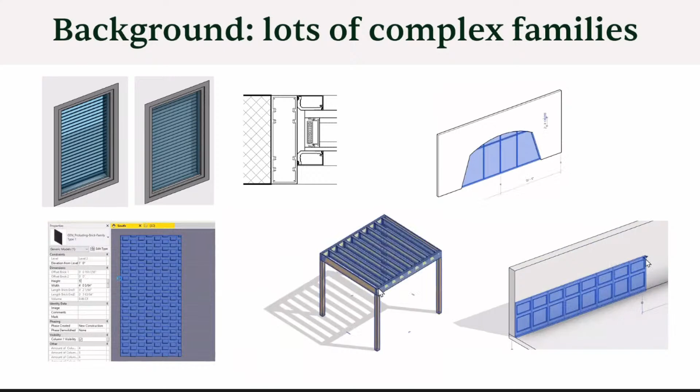Perfect start. Okay, so now we're talking. Now we're ready to formulate some formulas. So let's start. As I've been saying, I've been in a Revit families rabbit hole, and these are all the families I've been creating in the last year and a half. All my clients have been asking me for weird families, families with arrays that need trigonometry formulas, nested shared arrayed nested detail items, multiple layers, and that require complex formulas. It would be easy to mess them up, so I had to study formulas to make them even better.

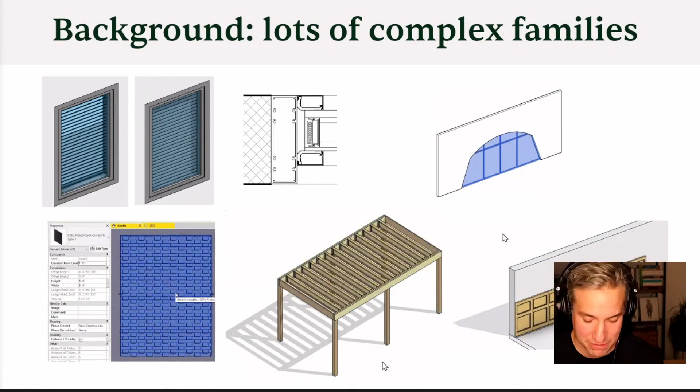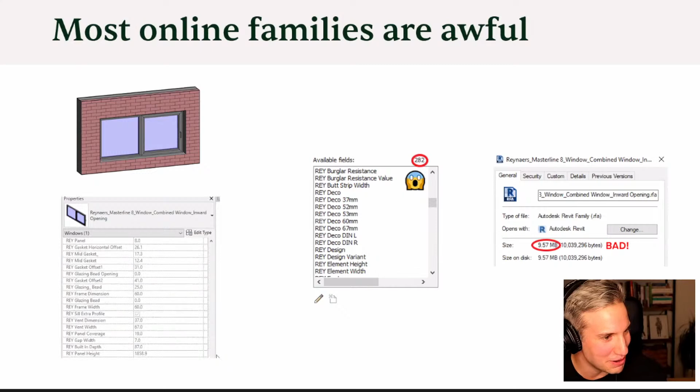One of the reasons I've been interested in Revit families is that in my experience, most Revit families found online are quite awful. I've been roasting this family for a while and wrote about it. I hope this company doesn't sue me for roasting their family. It's a family found on the BIMobject website, and it's just a terrible example. The family is almost 10 megabytes. There are 282 shared parameters that will pollute your model when you bring it into your project.

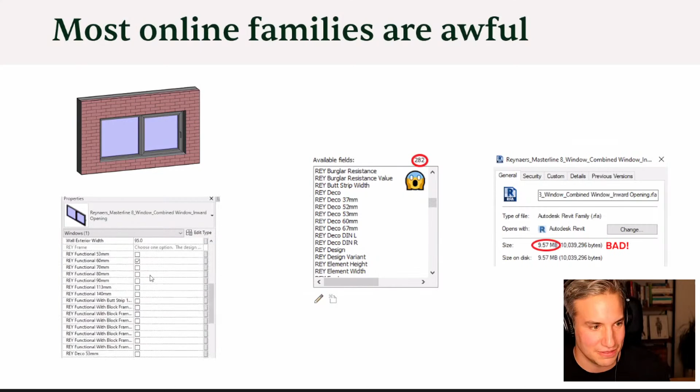When you look at it, you don't know what's going on. It's like a super family with thousands of options, but there's no guide, so the user has no way of understanding it. I'm trying to do the opposite: create families that users will understand, that are easy to use and obvious. I'm trying to simplify the life of the end user. That's always my goal. If you make the life of the end user hell, that's not good, even though technically the family is working.

I'm referring to Steve Stafford, who has a great blog article from a while ago. I think he's a former guest, right? Yeah, Steve was on the show about a year ago. I'll put a link to his episode. He came on to chat about Revit health monitoring, and we talked a little about family size. I gotta imagine everyone out there has at some point stumbled upon Revit OpEd, his blog, or one of his posts on Revit forums.

The muscles are the constraints and the parameters, the bones are the reference planes and the lines, and the skin is the geometry. And what I found is that most people want to go very quickly to the skin. They want to model the geometry as fast as they can, but they tend to go pretty quickly for the bones and the muscles. But I think it's critical that you really understand what you're doing for that part, and formulas can help greatly with that. So that's my little intro.

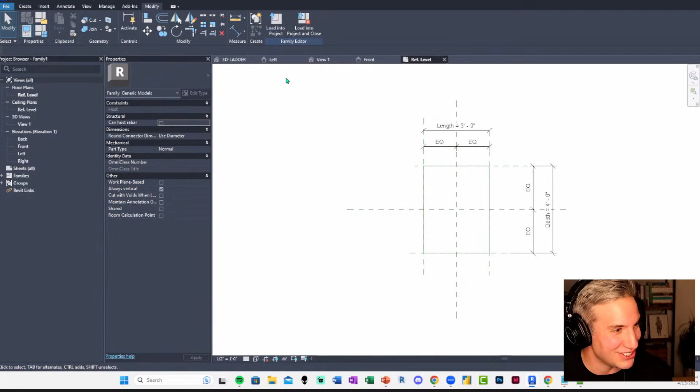Which I'm still on the fence about, but I love dark mode for most programs. But as you can see, the family types menu is still white, so they haven't completed the job. Progress.

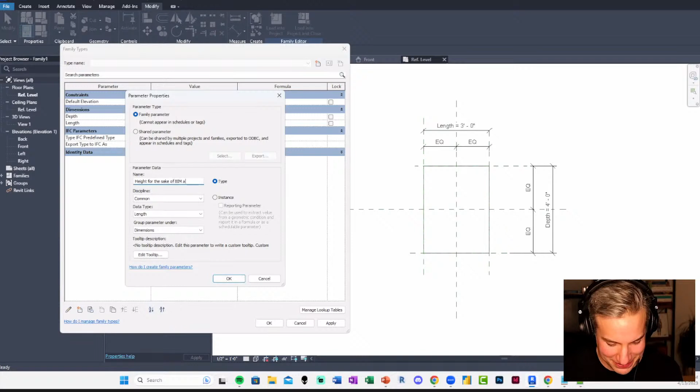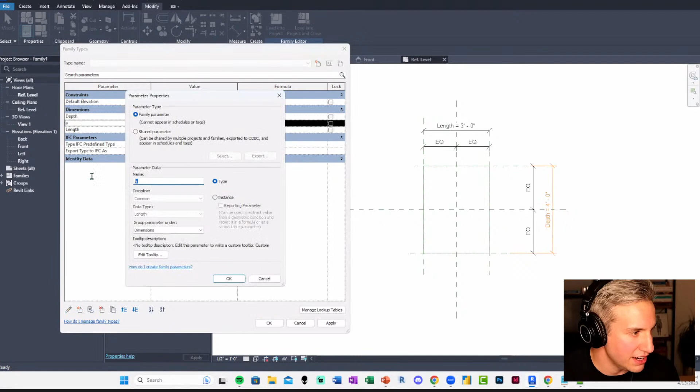So let's say that I add a new parameter, and I call it height for the sake of BIM after dark. So a really long parameter, and you're like, oh, I don't want to have to type this. Well, something that you could do, let me just copy this. I will just rename this to A. And then, for example, let's say that at the depth, I need to use this parameter. I can type it like this. And then I can click on the pencil icon and paste the old parameter name like this.

And in the formula, you don't have to change it. It will be automatically modified. So I find this quite helpful. So just to reiterate, anyone who didn't get that tip, super useful there. If you create a parameter, just use A or X or something like that, do your formulas. And if you rename that original parameter, it actually renames it in the formula for you, which is awesome. So very cool tip. Awesome.

And a tip on the same topic is that, most people don't know this, but you can select the parameter name in the column. You can copy and paste it, which I didn't know for a very long time. So I was forced to type it over and over again. If it's a short parameter, it's not a big deal. But in this case, like, oh man, I don't want to have to type this. Or maybe in the formula, you kind of have to scroll to find it. But you can just click here and copy and paste it like this.

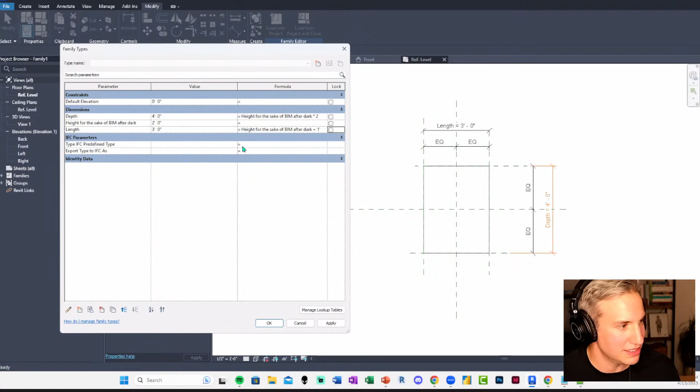I don't know if I ever thought of doing that. Maybe, I don't know. I actually don't even know if I knew that. That's pretty cool. I don't think I've ever had parameters that long, but yeah. It's kind of a worst case. I don't recommend using this kind of name for the parameter name. Okay, so something to avoid or at least try to limit.

And I don't know why, but for a long time I used dashes in my parameter names because I don't like spaces for some reason. And then I made peace with spaces because of the issue. But the dash is a math symbol. It's the minus sign, right? So Revit is confused: are you trying to type a parameter name or are you trying to use a math operator, the minus sign?

So if you try, for example, here a parameter with a dash and I use a formula, you will get a warning like this. And the way that you can solve this, first you can either remove the dash by renaming the parameter, or you could use brackets. If you use brackets, you can type the parameter name, even if it has a dash or other math symbols, and it will work fine.

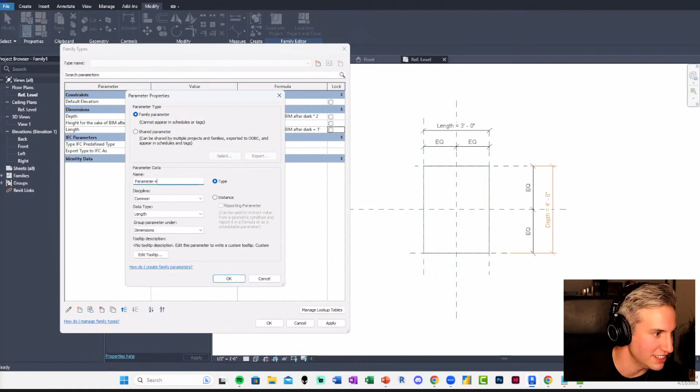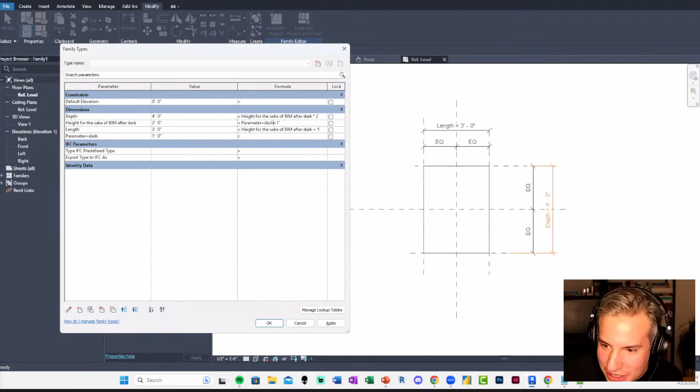So if I go to Revit and I create a new parameter, I've never tried with the plus sign. Let's try it with the plus sign. And let's say that this one is equal to parameter plus dash plus 1 feet, for example. It's confused because it thinks the name of the parameter is parameter. Plus another parameter named dash. Exactly. I have the wrong keyboard. Okay. So the first thing you can do is use brackets. So I can use brackets, and now it's going to work.

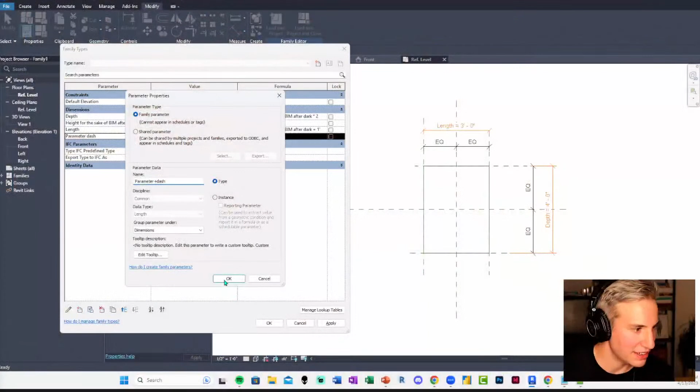And something interesting is if you remove the math symbol over there. So let's say I remove this. The brackets are automatically removed. Oh, that's weird. Not sure if I like that. But then if you change it and put it back, do the brackets go back? Yeah, they go back. Pretty sure, at least. Yeah, the brackets go back. So Revit's pretty smart with that. When you rename parameters, it will make it work. So you don't have to worry about this.

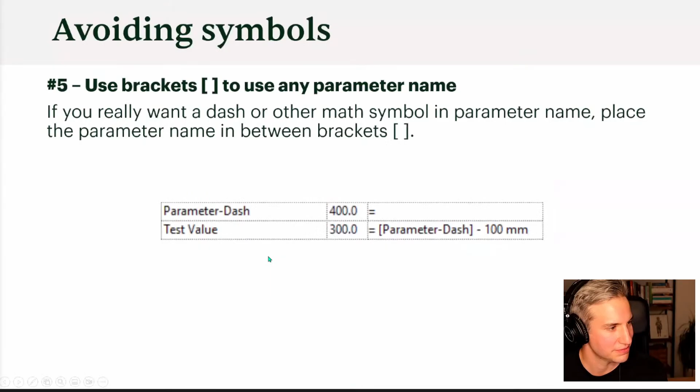Okay. Awesome. So brackets. If you have pluses, minuses, division, multiplication, anything in your parameter names, which as a rule we generally don't suggest anyway, but if you have to have it, then you can use brackets, which is awesome. And then Revit won't think that it's math syntax.

All right, so these were some usability tips. Now we're going to explore some of the formulas. So here are some math operators: equal, less than, greater than. Everyone's familiar with that. And then there are the if statements. I'm sure most people are familiar with that; I've used that a few times. Then there's the and, the or, and the not statements. So we're going to play a little bit with that.

And specifically, we're going to talk about the visibility parameter, or the yes/no parameters, because I found that a lot of people are confused about how to create formulas for visibility parameters. People tend to use if formulas inside of visibility parameters, but it's not necessary at all, because a visibility parameter has a binary outcome, yes or no. So using an if statement is redundant. You just need to type in the condition for yes, basically.

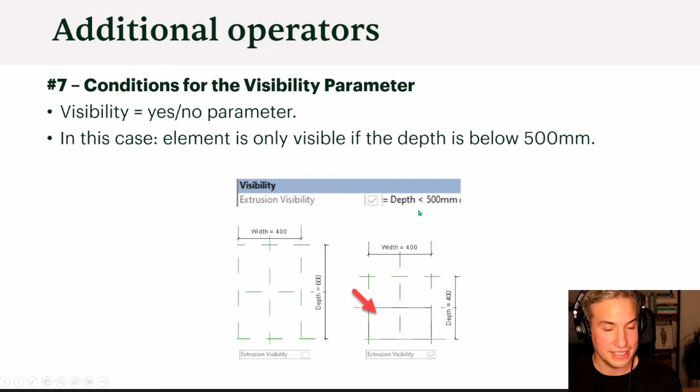An example here: if we have an extrusion and it's only visible if the depth is smaller than 500 millimeters, that's the simple formula in this case. That's it. You don't have to use an if statement. Super simple formula. So let's go over here. Do I have a visibility parameter? Not yet. So let me quickly add the visibility parameter for this shape. Extrusion visibility.

Okay, so going here, I do have my extrusion visibility. It's a yes/no parameter, as you can see with the checkbox. And here, no, don't type if statements. You don't need to. So let's say that I want this to be only visible if the depth is smaller than 3 feet. So yeah, it is hidden, because the depth is currently 4 feet, right? But then if I switch like this, it's visible again. So that's a very simple way to use these visibility parameter formulas.

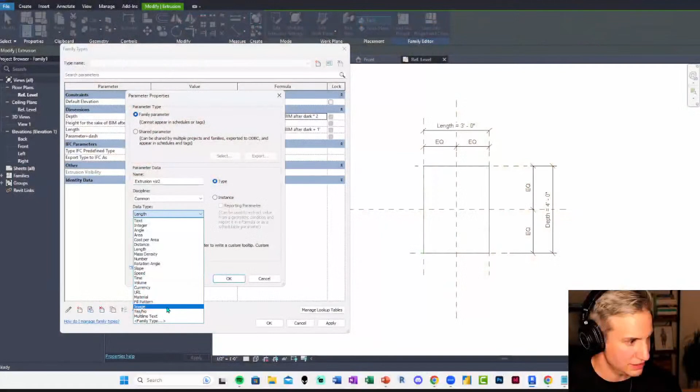That's a great tip. I think we all get into that immediately: when you think of this or that, you always think of an if statement, right? Because the if statement is very simple. Here's the condition. If it's true, yes. If it's false, no. But like you said, a visibility parameter, which is just a checkbox, only has a yes or no. So that's a nice way to clean up your families, guys. You don't necessarily have to do a complete if statement, because you already have a yes/no. The if statement is redundant.

I mean, it can still work in this case. It still 100% works, but to your point, yeah. So in this case, you could type something like this, and then you have to type like 1 equal 1, or else 1 equal 2. So that would give you the same result, but the formula is longer and it's harder to understand. So I don't use this. There's no point in using this. So just use this instead. Awesome.

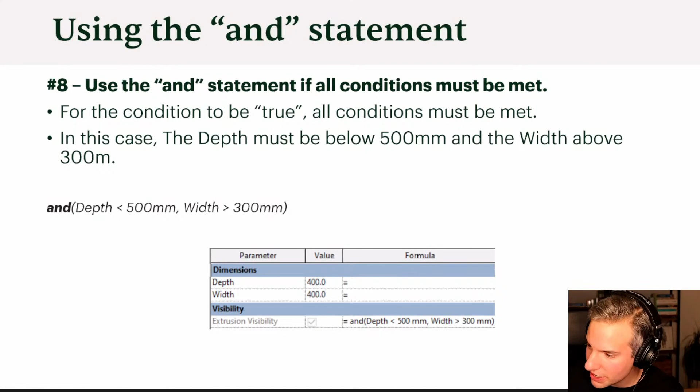Okay. And with the and statement, you can add multiple conditions. We're going to keep going with the visibility parameters. So in this case, let's say that this extrusion should be visible not only if the depth is smaller than 3 feet, but what else could we add? So I'm going to type and, parentheses, the first condition, and then I can add a comma and write as many conditions as I need. So in this case, for example, the length should be greater than 2 feet. So both conditions must be met.

So let's say that we play around with this, and I will remove all these formulas for now. So the depth is smaller. Yeah, now it's visible because both conditions are met. So that's an and statement. So if you have multiple conditions, especially for visibility parameters or any yes/no parameters, that works great.

Awesome. Yeah. So again, I'm just going to stress these tips as we go through because I think it's great for people. With the and, both conditions have to be met. So it can't be one or the other. So if you changed the depth to greater than 4 feet or whatever it was, unless the length changed, it's not going to change it. So that's the key with the and. And what's cool, as you mentioned, is that you can build in a lot of conditions in ands. Exactly. But to some extent, don't build in too many. But yes, you can build in a bunch.

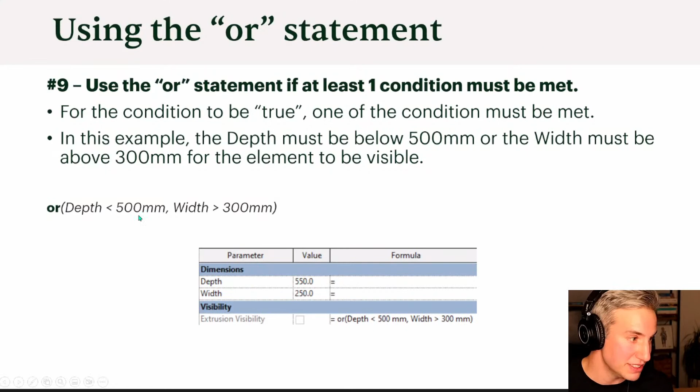Okay. This is the and statement, and the or statement is, well, you can guess what it does. Only one of the conditions must be met for this thing to be visible. So if we go back to the family, right now it is visible, but let's say that we move the length to is greater than, let's put this at 4 feet. You can see currently it's not visible, but if I switch it to or instead, now it is visible because the condition of the depth is met because it's smaller.

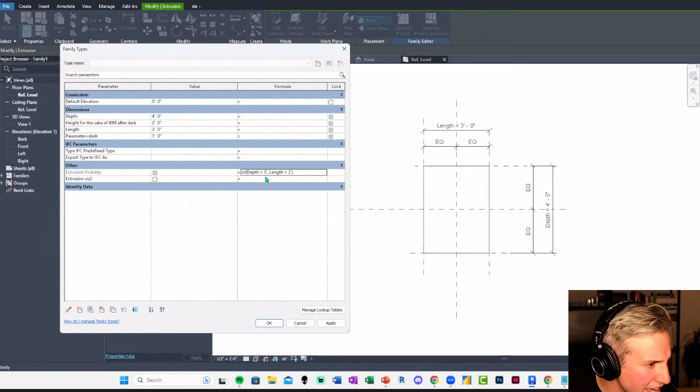It's smaller than 3 feet. No, it's not. The length is above 2 feet. So if I was to put it at 1 foot, now it's not visible because none of these conditions are met. So now I'm going to ask you a question, because I get this question all the time, which is, what if it's equal to 2 feet? What does Revit do? Because there's no greater than or equal to.

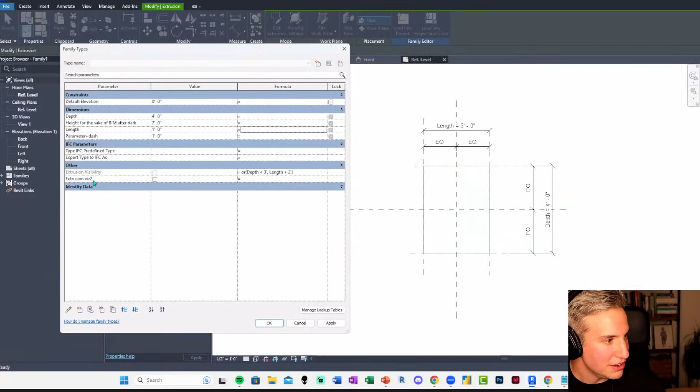So not is the last one, and especially for visibility parameters, if you have two options, I'm sure a lot of you have used this in the past. If you have two visibility options, using the not can quickly give you a result. So let's say that vis2 is only visible if vis1 is not. So I can just type in here not and the name of the other visibility parameter. So not extrusion visibility, and if I put this above 3, it's always the opposite.

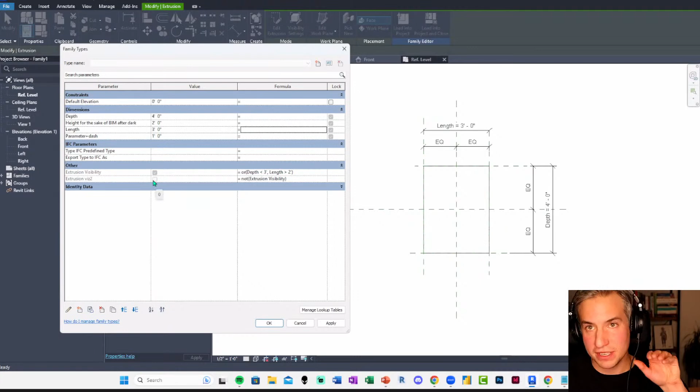So these two visibility parameters cannot be both yes at the same time. And that's regardless of if there's an and or an or above. It's just looking at the resultant, right? Exactly. Of the first one, it's only looking at the result. By not, it's saying I want to always be the opposite of whatever that guy is.

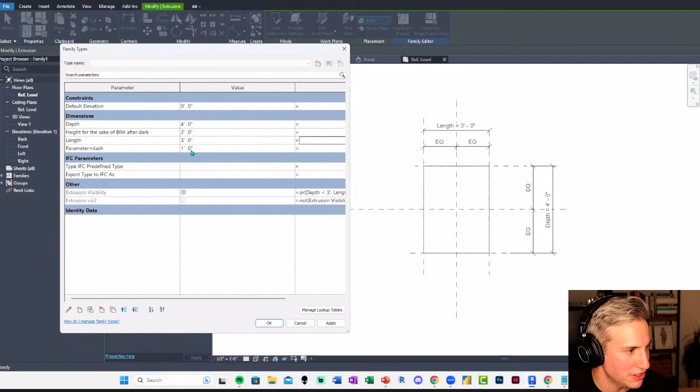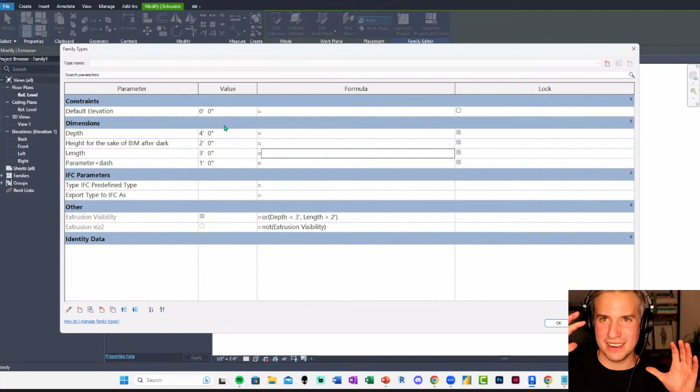Someone says I'm having trouble seeing your screen. Oh, okay. Maybe the formulas may be kind of small on their end. So maybe when you're in the Revit side, just control zoom in. Yeah, a tip for people who don't know, you can control zoom in. Just get ready, everyone, for the awful column organization of Revit when you zoom. Okay. I think it's just those parameter fields get pretty small. Yeah, because I record tutorials, I put the zoom in Windows at 100%. I know you can put it bigger to make all the text big as well, but when recording, it's better like this. Anyway, I hope it's better for the sake of visibility.

Okay, now let's talk about greater than or equal. And I've learned that from Brenton, who I think is sponsoring the show, or maybe previous episodes of the show, and who has been on my show as well, and has done some great work and research on families. I've learned a lot from him. So if you want to use a greater than or equal, you cannot use the symbol. The symbol doesn't work in Revit, which sucks. Does suck. I should email the team and let them know that it should work. Why not? It shouldn't be that complicated to program.

Anyway, if you want to do this, you have to type not and then type the opposite of it. So let's try it out inside of Revit. I can combine or, not, and and and mix them together. So in this case, let's say that I want smaller than or equal to 3 feet. I will type not, and then I will reverse. Instead of being smaller than, it's going to be bigger than, and I'm going to end the parentheses.

So let's say that I revert this to 1 foot. You can see right now it is not active because none of these conditions are met. But if I put it exactly at 3 feet, now it works. And it wouldn't have worked before. So that's the workaround for greater than or equal, or smaller than or equal.

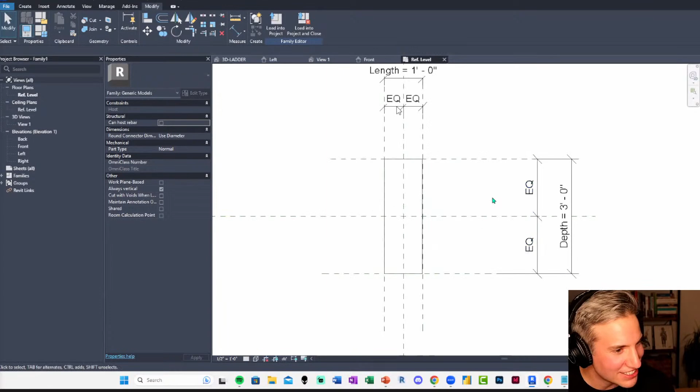Okay, so I have my depth. I'm actually going to go back here and rename depth, and I'm going to call this actual depth, and I'm going to create a new parameter that's going to be called user depth. So the user depth is the one that users will have access to, and actual depth is the one that's going to control the geometry.

So if I go back to Revit, first let me enter a value for user depth over here. So I'm going to type this formula for the actual depth. And am I zoomed in enough? I hope so, look at those columns. Oh, it drives me nuts, man. The second you start zooming into that, I don't know what they did with the UI, but unfortunately you'll never, ever get the columns to work again, and it moves, and it's really annoying.

Yep, it jumps. So if user depth is smaller than 500 millimeters, make it 500 millimeters instead. And if not, we're going to nest another if statement: if user depth is bigger than 1500 millimeters. Oh no, this will not work.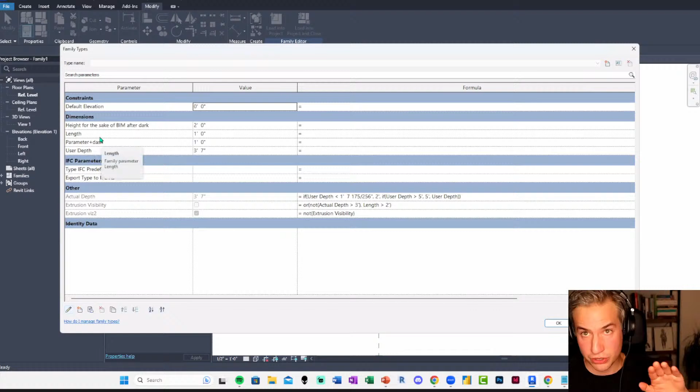All the dimensions that the user can actually change and is encouraged to change in a project, I put them in Dimensions. All the parameters I don't want the user to touch at all, I put into Other. That's the first step.

I don't have DiRoots installed since it's Revit 2024, but if you use a shared parameter and open the shared parameter file in Excel, there's a column that says Visible. You can set it to 0, and the parameter becomes invisible when the family is loaded into the project—it's only visible in the family editor. But that has to be a shared parameter, yes.

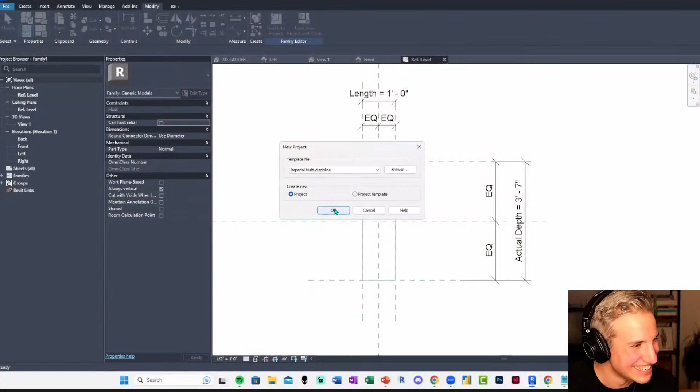Interesting, so in the shared parameter file you're using that visibility setting? Yeah, maybe I should just show it. Okay, I'll create a project using the Imperial Multi-discipline template.

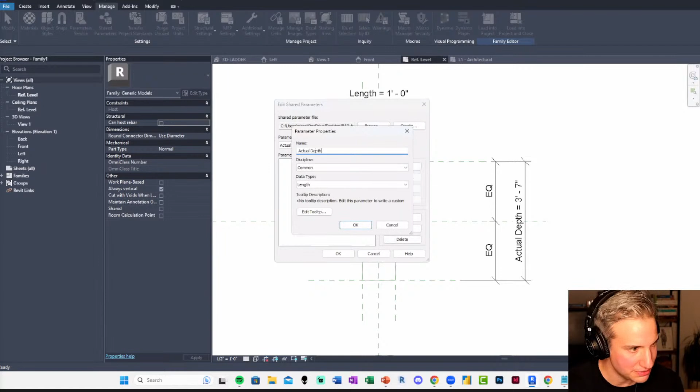First I'll create a new shared parameter file. Let me create a new file—I'll put it on the desktop and call it 'bad.' Here I'll name the parameter 'actual depth'—no wait, that's the group—okay, actual depth. It's a length type of parameter. Now I have to open Excel.

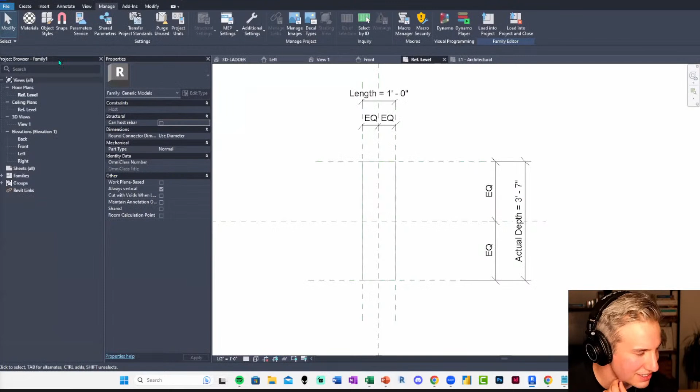What's this, wherever you put it... didn't I save this file on the desktop? Yeah, I'm having trouble with my desktop recently because of OneDrive. I was just going to say, let me guess, OneDrive. Where is it, is it gone? Oh man, that's so annoying. Or maybe—okay, no, I just have to... yeah, okay, there you go.

But regardless, I still have trouble with my desktop because of OneDrive—is there a way to turn it off? It's so annoying. I went down a hole with OneDrive and now I'm pretty confident with that beast, but there's a lot to learn to use it successfully without throwing yourself through a window. It can be an awesome synchronization tool, but it takes a long time to figure out. I use Google Drive for files I want to sync, so OneDrive is kind of redundant, but I haven't turned it off anyway. I could probably do a whole episode on OneDrive, SharePoint, and servers since I went down that rabbit hole about six months ago.

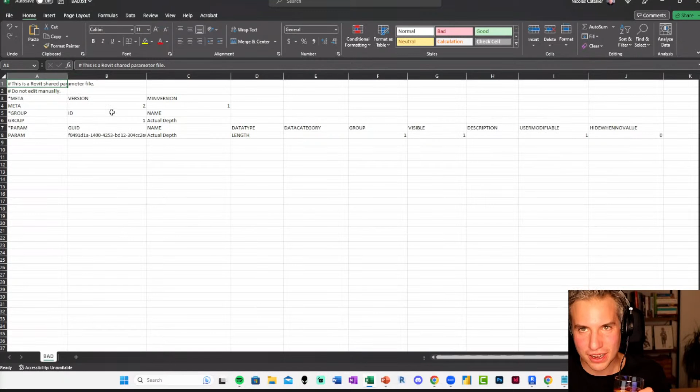Okay, so you've got your shared parameter file open in Excel now. Yeah, it's a text file, so you must set it to show all files to open it. Here I have my parameter. By the way, it's not something I recommend you casually do—opening the shared parameter file in Excel—because if you mess up the GUID number, you might break something. Make a copy of it and talk to your BIM manager. I'm not responsible if you break something.

But anyway, here's the column that says Visible, and I'm going to switch this to 0. Okay, and I'll save this file and close it.

Now, something really cool that most people don't know: you can create all your parameters as family parameters, but if you later decide you need a shared parameter—to schedule or tag it—you can click on it, like the actual depth parameter, click the pencil icon, select Share Parameter, and then select my actual depth parameter.

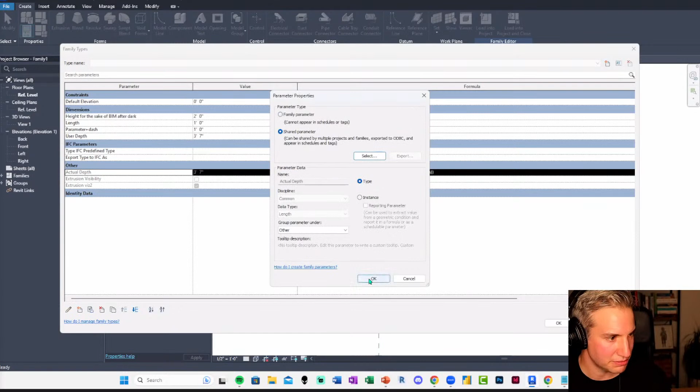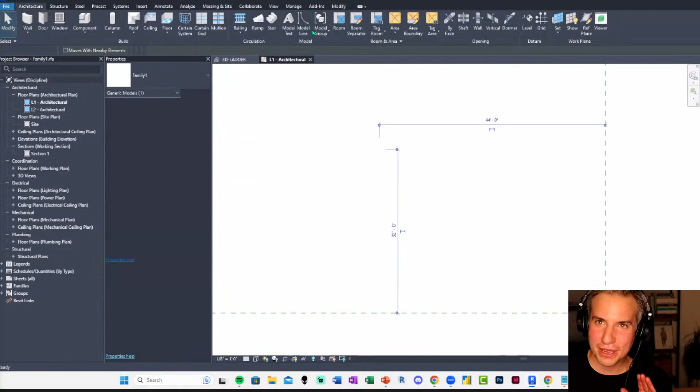Right now everything seems the same, except if I load this family into project number 1 and place it, and go over here, you cannot see the parameter—it's hidden, only visible inside the family. That's pretty cool, right? It's kind of scary and sneaky, but also pretty cool—I have to say, it's neat.

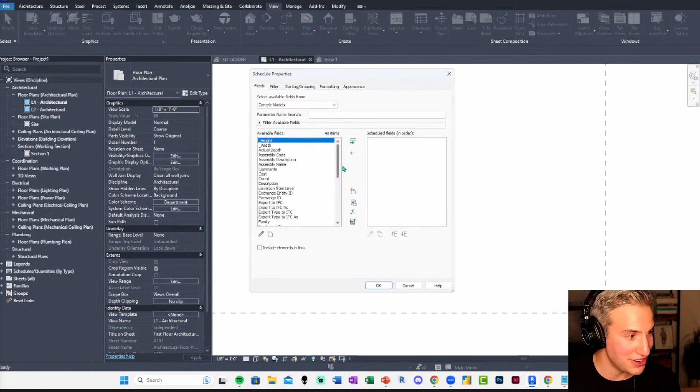I guess that's actually pretty cool. Except the one downside I found: if you create a new schedule, and this is a generic model, since it's a shared parameter, you're going to see it here—which doesn't make sense, but it's a shared parameter, so I guess it does make sense.

That's cool. So there you go. That's how you can hide a parameter. You have to make it shared and turn its visibility to 0 with caution.

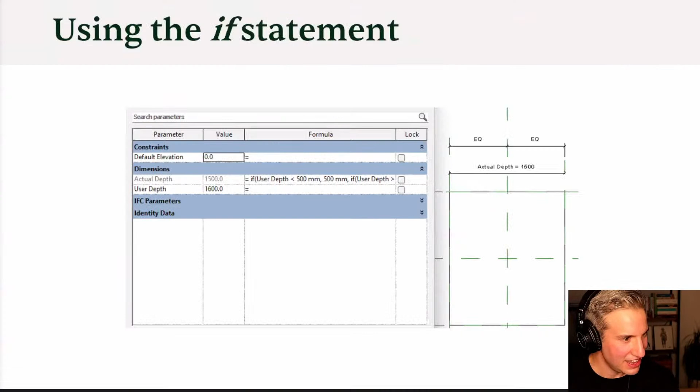Okay, we did that. Okay, let's talk about text values. Another rabbit hole that I went into, trying to use text in if statements. So let's talk about using text as the result. I'm using fruit a lot in the following slides. So let's say that I create a new parameter that is called favorite fruit, and it's going to be a text type of parameter. And for example, here I could use a formula that says if, then I can type

my condition, if depth is, I'm going to zoom in a little bit once again, even if it messes up my whole, what the hell is that? By the way, once you zoom in, just so everyone knows, the only way that I've figured out how to refresh that is to close and reopen Revit. The second you zoom in that dialogue, you're done for that session, as far as I can tell.

Okay, so let's say that the condition is depth is greater than 3 feet, and then you can type in quotation mark the name of the fruit, if that's the case, or any text, of course, and then comma, and if the result is below 3 feet, then you can type in another fruit name, strawberry, like this. Let's use actual depth. There you go. So right now it's banana. So I put this at 2 feet. You can see automatically the text changes.

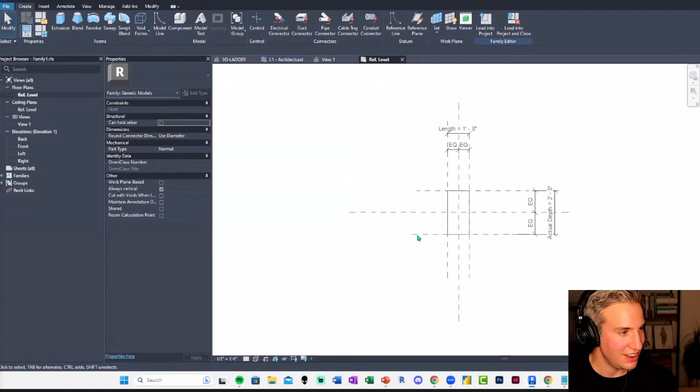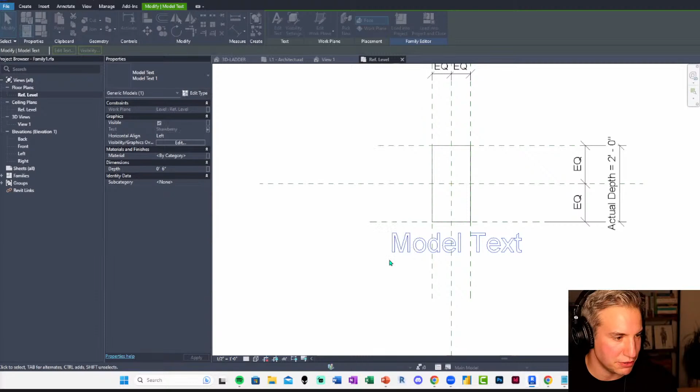And by the way, a cool thing that maybe people don't know about: I know some people doing facility management like to place 3D text in their families, like for the unique number, because the text size doesn't change with the scale of the view. So if you place a 3D text, you can click here on the small rectangle and map this parameter to a text parameter. So in this case, I can map it to favorite fruit, and the fruit is going to be displayed, and it's going to update automatically based on this formula.

So if I change this to, which parameter? I don't remember. Okay, this one. If I put it to 4 feet and I click on apply, you can see the name of the text has changed over there.

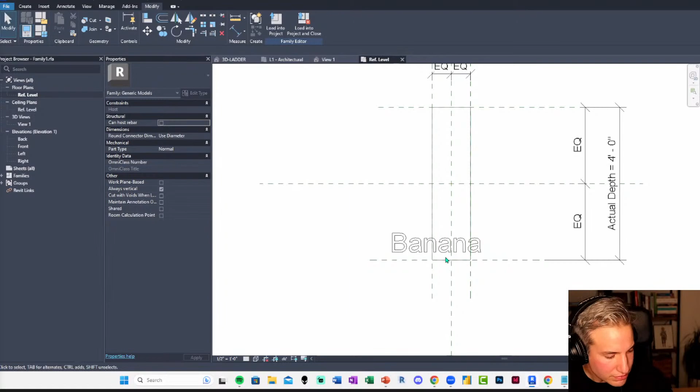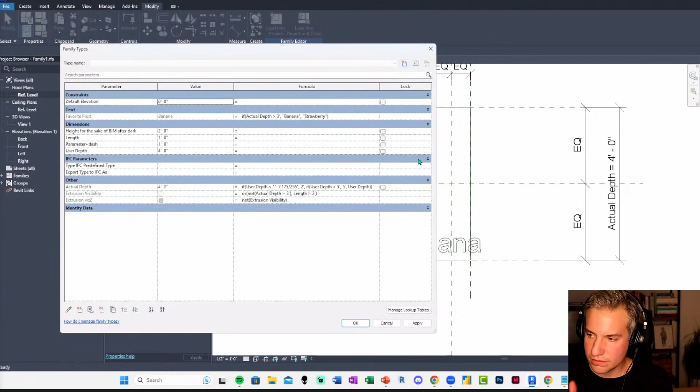So the takeaway there too, what you're showing is by pulling from the actual depth parameter, which was the formula-based parameter, it lets you take a numerical value or a dimension and use it in a text string, right? Because if you went directly to the depth, that would be inconsistent units and syntax error and all those lovely things. But because you're pulling out the actual depth, which is really just a formula, Revit's allowing you to use that information to push into a text parameter, which is pretty cool.

Exactly. Well, this is the condition, the first one, and these are the two possible results. The possible results are text, and you can put them in quotation marks. So all good. But then I'm going to talk about what I don't like about the family editor, which is that you cannot use a text as a condition. So for example, in this case, if the favorite vegetable is onion, then the favorite fruit is orange, else it's banana. Or I could do the same thing.

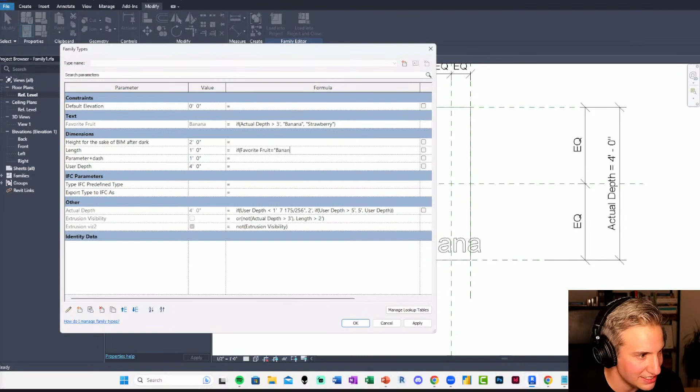For example, let's say if the text is banana, this length value, in this case, it would be if favorite fruit is equal to banana, the length is going to be 2 feet, else it's going to be 5 feet. That would make sense, right? But if I tap enter, improper use of Boolean expression. Why? Because you can't use text.

This bothers me. Exactly, but there's no reason anyway. So I wish you could, but you cannot currently. So that doesn't work. However, there are workarounds. I've explored them all. There are 3 possible workarounds for this. You can nest like I did earlier. I think I'm going to skip this slightly.

So one of the possibilities is to use an integer to represent each text value. Okay, so I'll repeat that. You can assign a number that represents each possible text that you have. And this way you can use text as a condition, but by using an integer instead.

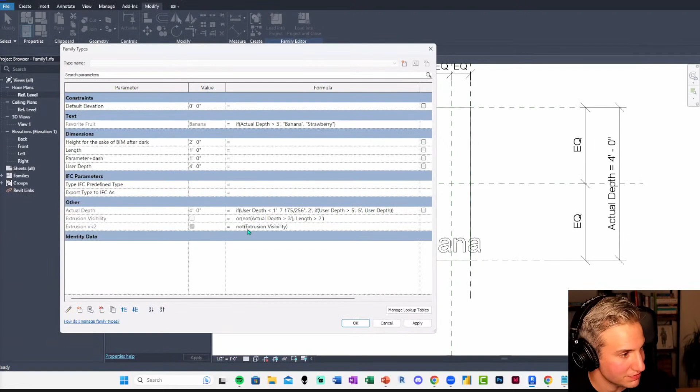So for example, the fruit integer, this is where I'm going to type all the constraints. Let's say that the orange is 0, the banana is 1, and the strawberry is 2. And then I'm using the fruit integer parameter here to type my actual dimension constraints. And then I can use this fruit integer elsewhere to drive other dimensions. Okay, so I'll do it.

So I will create a new parameter by clicking on this icon, and in data type I will select, where is it? Integer, right there. And I'm going to call this fruit integer. So my fruit integer is right here. In this case, it's going to be if actual depth is bigger than 3 feet, the integer is going to be 0.

Else, I'm going to type another nested if statement. If actual depth is bigger than 5, it's going to be 1. Else, it's going to be 2. And now I have a number over here. So actual depth, where is it? Actual depth is bigger than 3 feet. It should be 0. Okay, so if I make it smaller, you can see that this number changed.

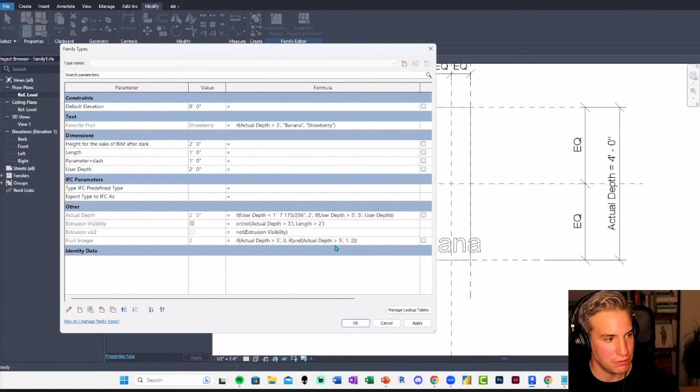Although currently, I could add an and statement, because right now it doesn't make sense. So it would have to be a range, right? So actual depth is, anyway, I would have to see. My brain is a little too much Negroni sbagliato, I think.

Yeah, right. So you nested 2 if statements in there to make your range, it looks like. Exactly. Or are you using the visibility there? I mean, yeah, that's one way. Exactly. You could put in a range in a formula, or you could also only use two possible options. So in this case, it's going to be 0 or 1. If you need more than two options, you can use an additional nested if.

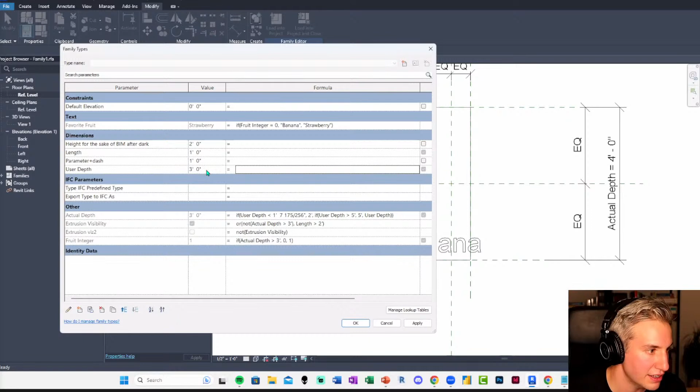And now I can use this. So for example, here I could use if fruit integer is equal to 0, it's going to be the banana, else it's going to be the strawberry. And that's the way I can control this parameter, the favorite fruit.

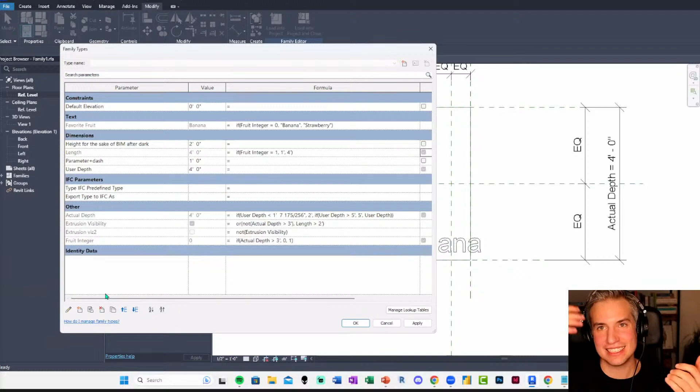And now, for example, if I need to drive the length based on the text value, I can use this fruit integer instead by saying, if fruit integer is equal to 1, the dimension should be 1 foot, else it's going to be 4 feet. So it's a workaround. Right. It adds this step of adding the fruit integer parameter, but it's a workaround to use text in a different way. Yeah, that's great. That's awesome.

All right, I'm seeing the time fly, and I think I should finish with the lookup tables. What do you think? I think so. I think that's something that not a lot of people have talked about. Out of the 99 episodes so far, I think there might have been only one episode where we talked about lookup tables, and I think it might have been one with Paul Aubin a long time ago. So there's definitely some value to jump into those. So do it, man. Let's do it.

So even by using this integer technique, the limitation is each time there's a different condition, you need to boost the formula and add an additional nested if statement. And if you have 10 possible favorite fruits, for example, you could have 9 nested if statements, which creates a crazy formula. So the workaround in this case would be to use a lookup table. And the lookup table is a CSV file that you can create in Excel, and that is using this format.

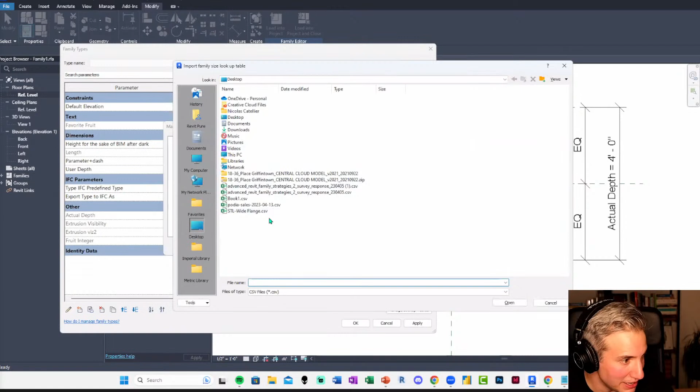All right, so the lookup table is done. I'm going to save it on the desktop. And I must make sure to save it as a CSV file, so a comma delimited file. And then I can close it. Actually, I might need it, but for now, I will go to Manage Lookup Tables, click on Import, and import this file that is called Book 1. I don't think you changed the name. Yeah, it's called Book 1.

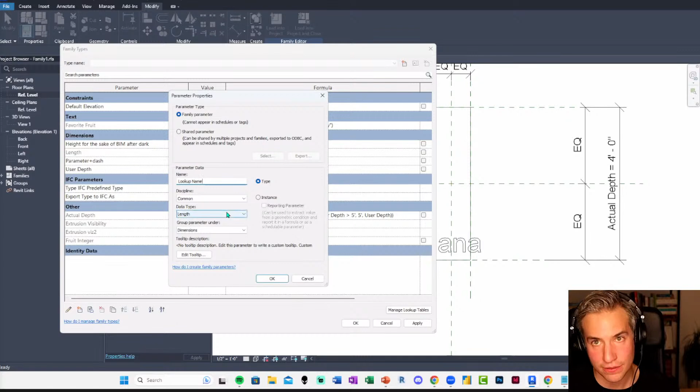Okay, it's called Book 1. Then I'm going to create a new parameter. And I know I'm going fast because we're not going to have enough time, but the instructions are there in the handout if you want to try by yourself. So I will create a new text parameter for the lookup name. And here in the formula, it's going to be called Book 1, so the same name as the CSV file.

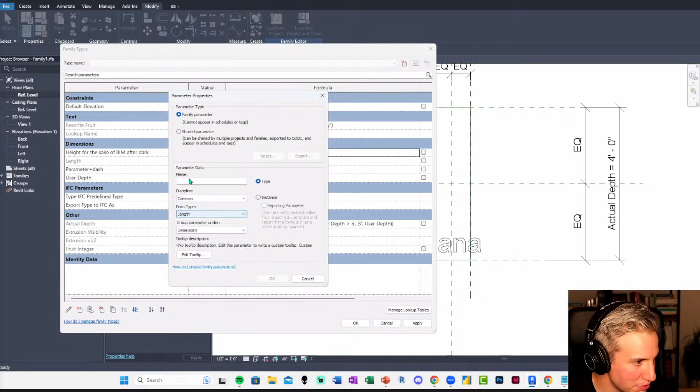And I will create a new parameter that is called, let's start with the length parameter actually, and this is going to be the cocktail dimension. And just quickly, I will change all the units from this project to millimeters. Just make sure I don't screw up. I'm sure it would work anyway, but just to be extra safe, I'm using millimeters now. Okay, all good. So I have my cocktail dimension.

And now I always forget how to use this formula, by the way. But it's size lookup. Okay, so I will type in size_lookup, then parentheses. And then I must type in the name of the parameter where the name of the CSV file is located. So in this case, it is lookup name. Then I add a comma. And then I must type in the column that I want to use.

So let's quickly open the CSV file once again, the Book 1. And in this case, I want to use column C, which is called cocktail dimensions. I will just quickly copy this and paste it into Revit. Like this. Okay, so that's the second condition. The third one is the value if the value is not found: if Revit is looking for a number and doesn't find it, what is the default value it's going to use? So in this case, I'm going to use 10 millimeters.

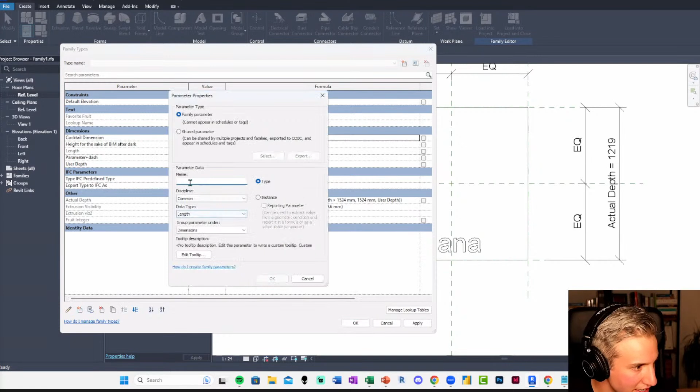And I'm going to create a new parameter that is called cocktail key. So I'm creating a new parameter, text, no, it's a number. A number parameter called cocktail key. And then I can type 1, for example, and then I can paste this formula back. I know that's a lot of steps. It's okay if you're not following. There's the handout. And then I can use my cocktail key here, hoping it works.

It seems to work. So you can see the cocktail dimension. The value is 1, it's 50 millimeters. If I switch this to number 2, it's 400. If I go to 3, 500. To 4, 600. So yeah, that's the power of the lookup table. You just need to change one parameter and the rest is changed.

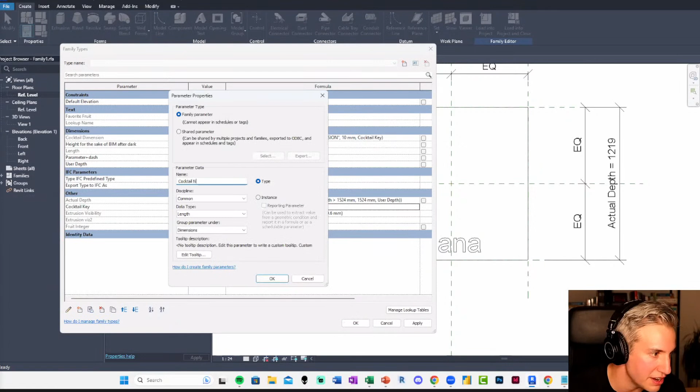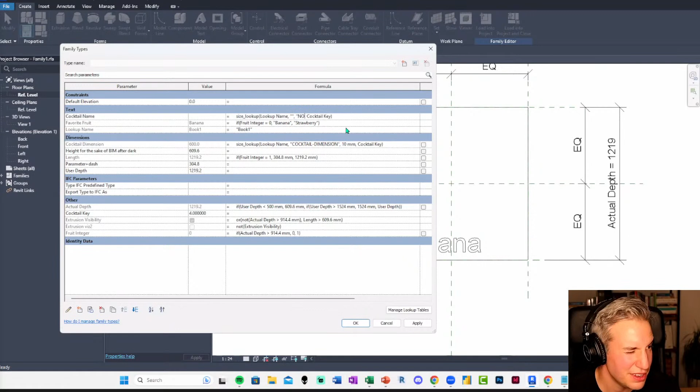And I can do it as well for the cocktail name. This is going to be a text parameter. So cocktail name, I'll just copy and paste this formula, but I need to change a few things. The cocktail key is the same, lookup name is the same. But if I want to use the first column, as a workaround, you can just type in nothing, just the quotation marks. And here, since I'm using a text value, I'm going to type in no cocktail. So if it doesn't find the key, it's going to say no cocktail.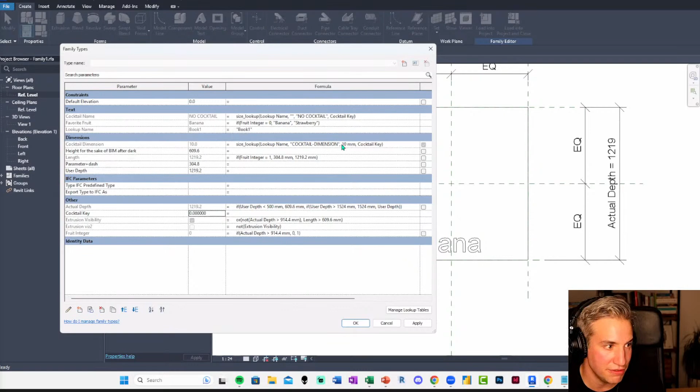So right now it says old fashioned. If I type in other numbers, it says martini, Manhattan, Negroni. And if I type 0, for example, it doesn't find it, and it says no cocktail. And you can see the cocktail dimension is 10 millimeters, which is the default value that we typed here. That's awesome. Hopefully everyone followed what's happening there. So it's using the CSV file. If anyone's familiar with Excel lookup tables, it's basically doing that, right? It's looking for the column, looking for the result.

There was a question in the chat about the difference between a lookup table and a type catalog. And I think you just kind of showed it there, right? The type catalog is saving the values of all those parameters for that type. The lookup table is actually using that data to input parameters within it.

There was another question that I think was a good one, which I think also might show the difference between a type catalog and a lookup table, which is: do lookup tables get embedded in families, or do they have to live with the family, the CSV file? No, that's what's great about lookup tables. It's a very small file. The CSV file is like 1 kilobyte. And it's included inside of the family once it's imported. So you don't have to send it. If you have a family with a lookup table, it's included inside of the family.

Right. That's awesome. And I think it was John or somebody who asked the question. So thanks for the question, man. That was awesome. And actually, Paul Aubin just jumped on, and we just mentioned you, Paul. You missed it. I said out of the 99 previous episodes, I think you were the only one who mentioned lookup tables. And I think it was that episode where we did that crazy symbol stuff, that symbol hack or whatever.